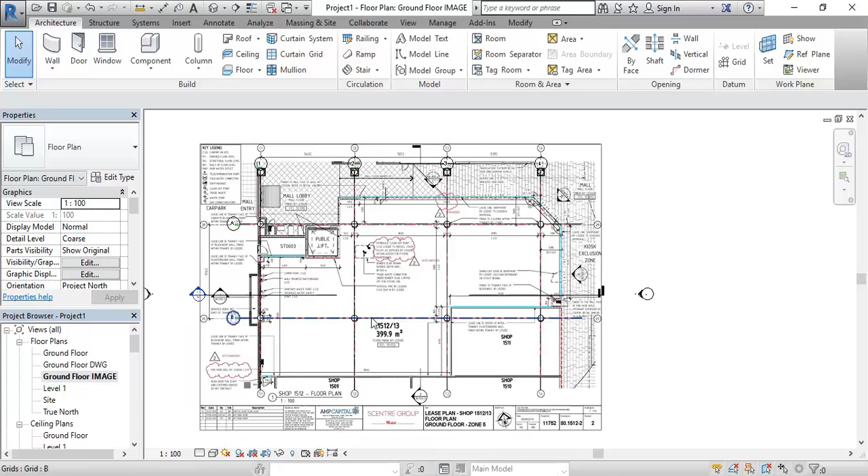Okay, so now to get a better feel for the project, particularly in 3D, I want to put in some more physical elements before I go too far with any more of the setup. So I'm going to start with these solid walls that we've got going around most of this tenancy.

Just some tips here for that setup, because you could just trace them off the plan, but particularly where it's an important reference, as you've got down here. So here it's probably set out from a grid line or something, also it's not a grid line, but we've got a measurement for that. And then also over here.

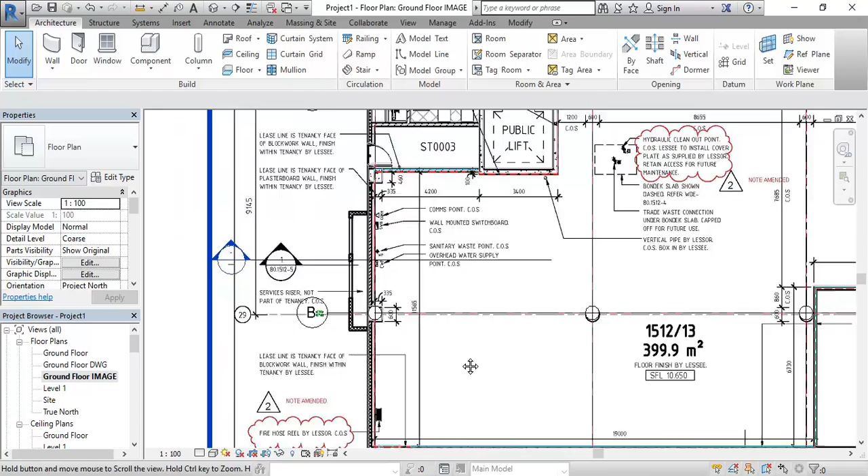So what you should usually do there is think about using reference planes as well as the grids to establish some of those measurements. So I'm going to draw a reference plane.

So again, I should just remind you, it's on the architecture tab. You'll find the reference plane tool in the very last panel there, which is work plane, and then you can see the reference plane tool. And it's very similar to drawing grid lines.

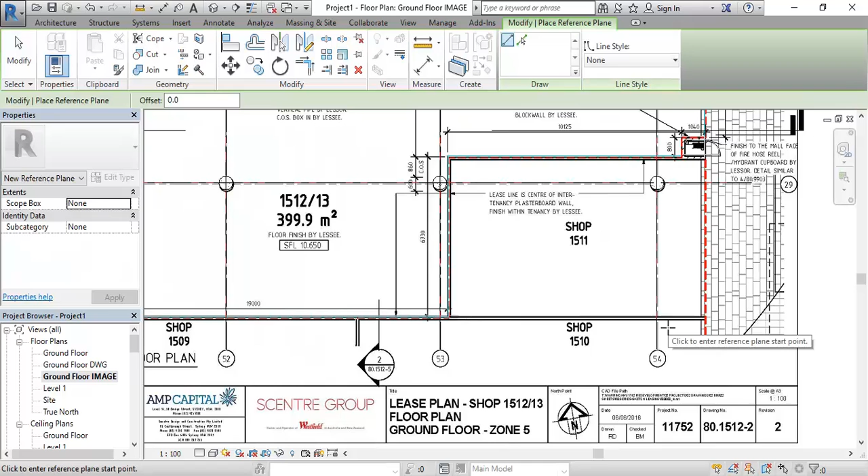So I'm going to zoom in though to trace the line of that wall and bring it over all the way to the left so that it goes about as far as the grid line. The inside - and the reason is it's an interior project, so the interior measurements are really what we're focusing on.

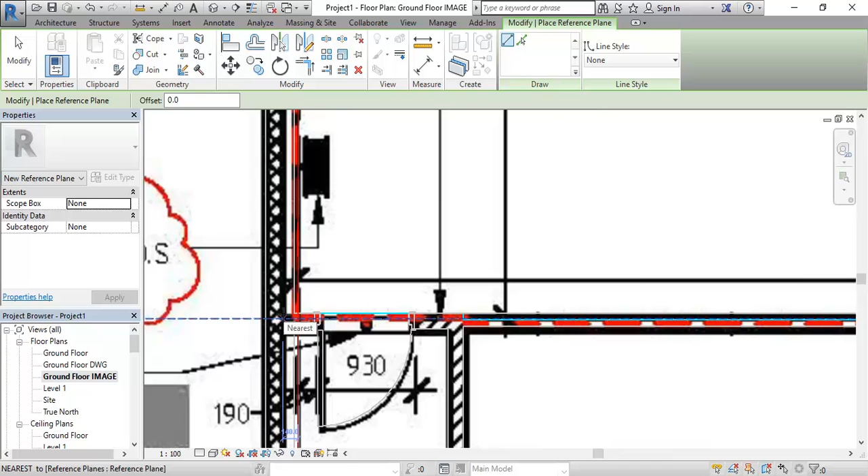Okay, so I'm going to press escape now a couple of times so that I can select that reference plane and have a look at the dimensions.

So now the way this was dimensioned isn't all that helpful, but we can mathematically work out what it should be.

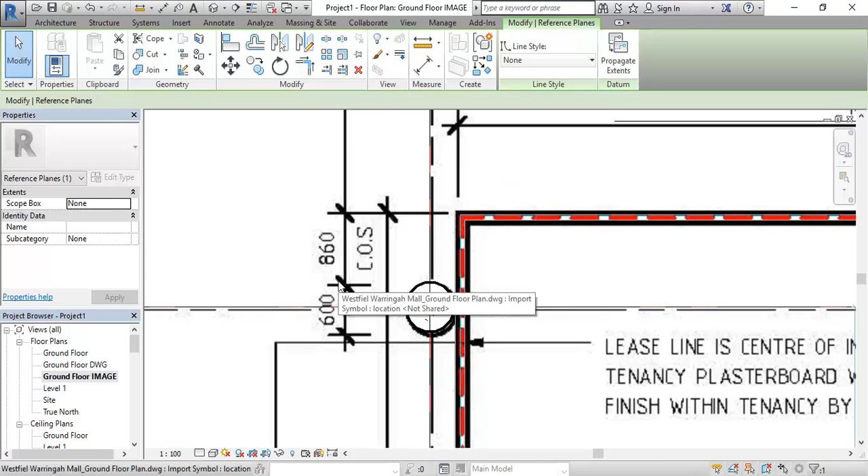So you can see you've got the column size there, we know it's 600. So half of that is 300. And then we've got the other measurement there, 860. So 300 plus 860 is 1160. And so 1160 subtracted from this number should give us the distance from the grid line to the wall.

And you need to do calculations like that when you have dimensions given to you like this. I know it might seem quicker to just draw it close to the right spot, but you're actually just creating work for yourselves if you draw things inaccurately, and you'll know the people who draw things really slowly and take forever to make changes to their models are often the ones who've tried to do it too quickly at the beginning and done it too roughly.

So again, using those measurements, 1160 subtracted from 6730, minus 1160. So it's half of that column size. Half, yeah, because that's where the grid line is.

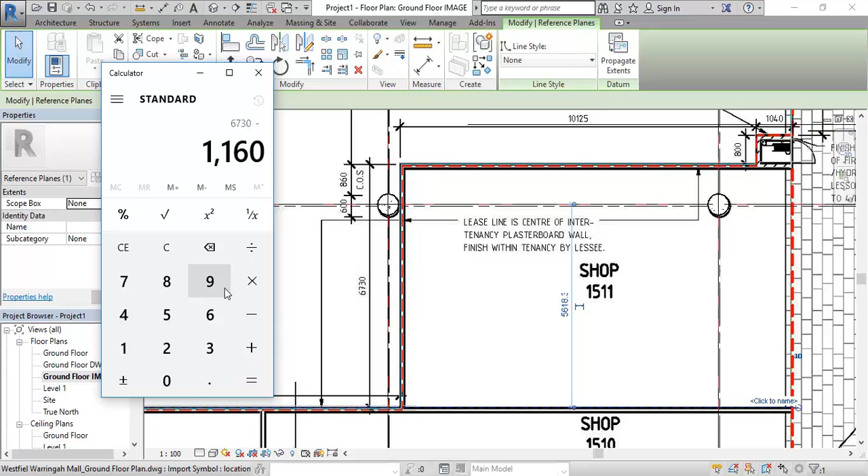So that equals 5570. So I can see over here it's actually 5618. So I can simply select that now and type in 5570, enter, and it's moved the reference plane slightly off the drawing, but that's okay, we know it's the right measurement.

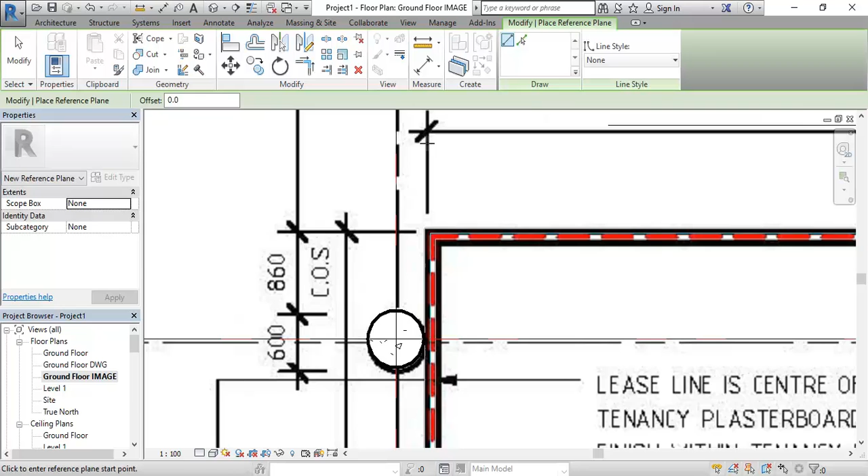So I'm going to do that for all of those exterior walls. I'm going to draw a reference plane, first by tracing, but then just trying to use a bit of logic to make these round numbers. They don't need to be exact copies of what's really been built or even what's been dimensioned here. The main thing is that they're round numbers.

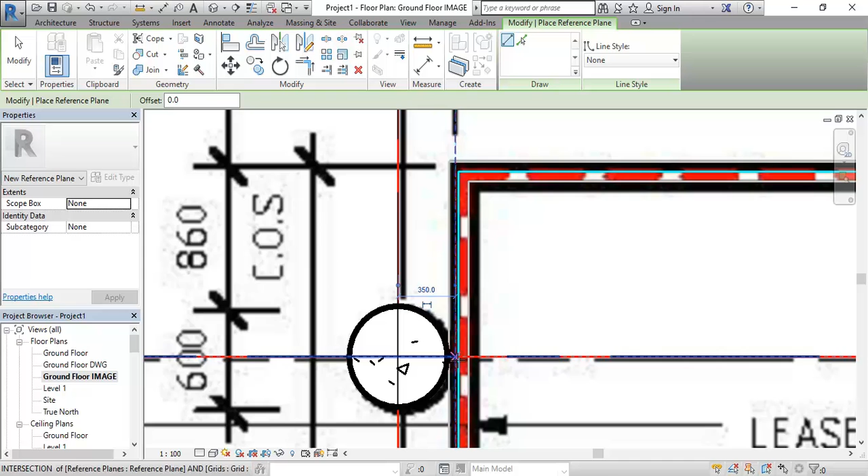So here 346 isn't a very easy to work with measurement, but I can easily round that off to 350, which is possibly what it is anyway. It's either 350 or 300 maybe, but I'd say that there is a little gap there.

So again, tracing the inside of this wall. And again, just looking at that temporary dimension there, and I'm going to round that off to maybe 1150.

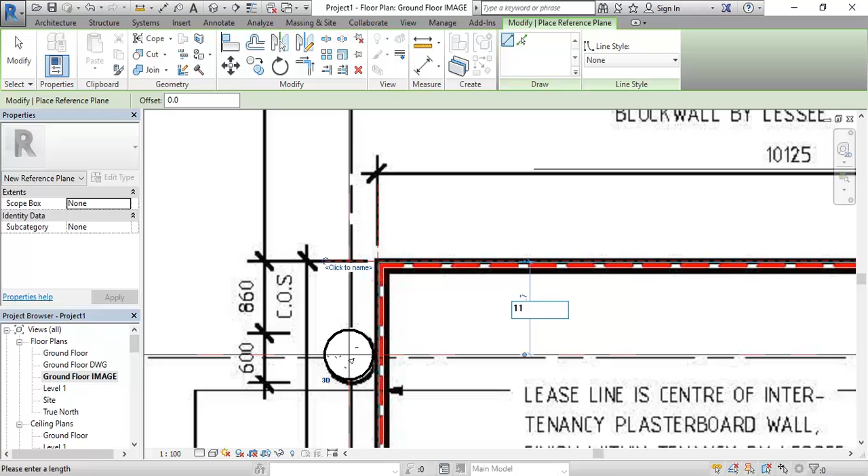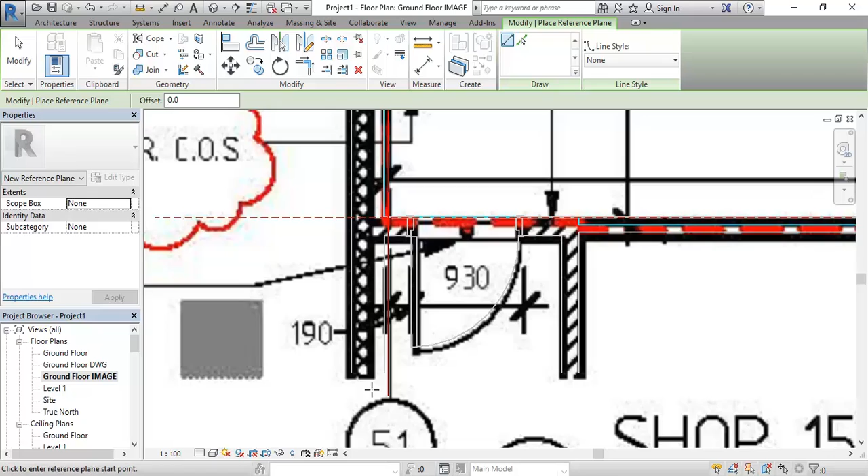And these walls that have the shop front, I'll leave for now, and we'll come back to those. So I'm just getting those other solid walls, again just trying to trace that inside face. And this should give you the size of your tenancy as well. So just tracing this all the way up.

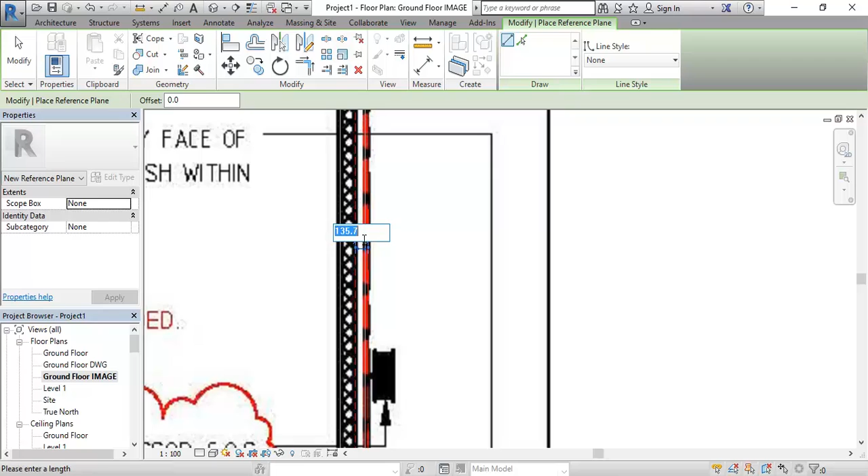Okay, so one more, oh sorry, two more. I think that's all I'll need for now.

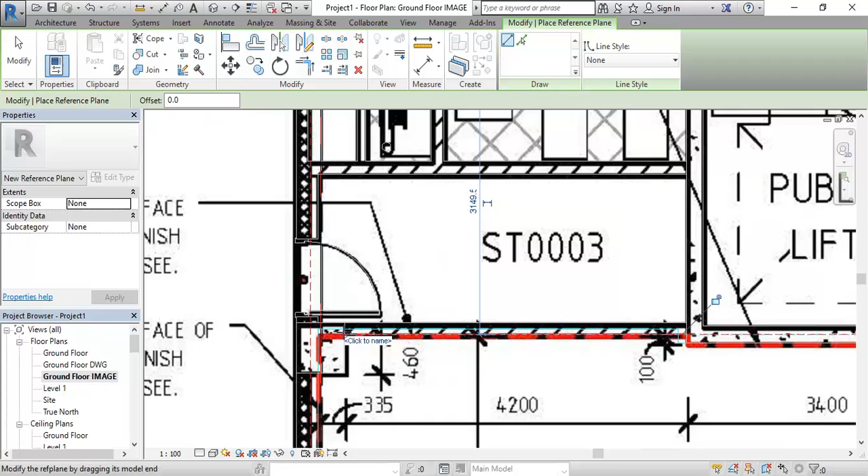Now you'll find sometimes that you'll have AutoCAD lines that if you trace will work pretty well. So I'm going to go back and have a look at the AutoCAD. See there, so that's actually turned out exactly the same, even though I didn't actually trace the AutoCAD there.

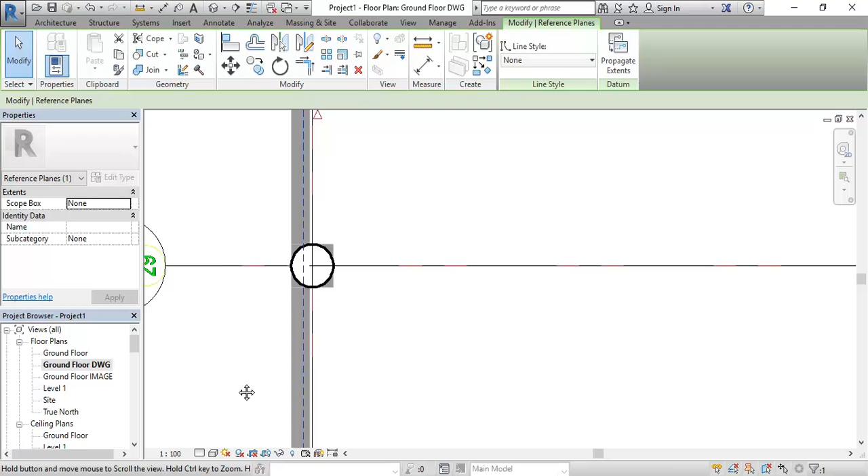This one is a little bit off. But I think this is actually, well, let's look in the one with the image. So I think the AutoCAD's wrong in some ways.

Yeah, so there you can see that's actually where the wall is, but in the AutoCAD version, it's different. So I'd say this one is more likely the right one.

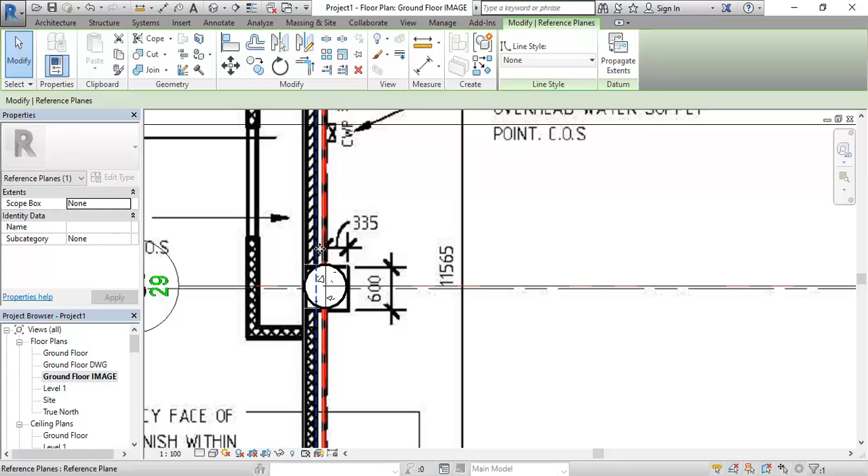Again, don't be too fussy about it. It's really just to make your life easier when you're working. It's generally much easier if you don't have lots of rough measurements. If you round things off and just try and make sure they're going to connect in a good way.

And so again, keep checking the original ground floor so that you can see the reference planes and the grids. The outside, yeah, so just the outside solid walls. Yep.

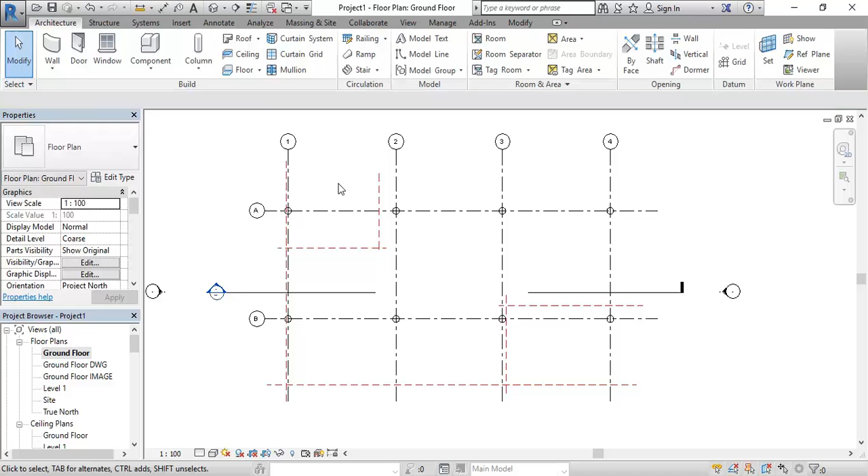So I'm just going to do the next step, and that should make it a bit clearer why I'm doing reference planes. Don't worry if you haven't done them all yet, because I'm just going to draw some walls now. And it should make it a lot clearer why I'm doing it this way.

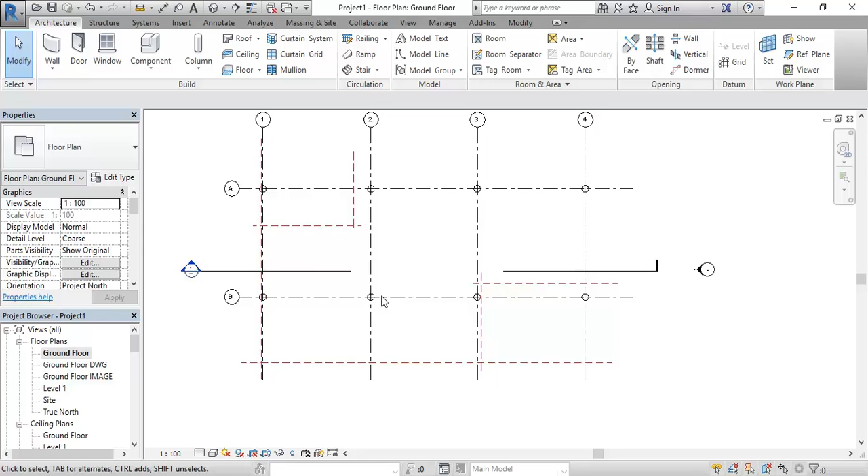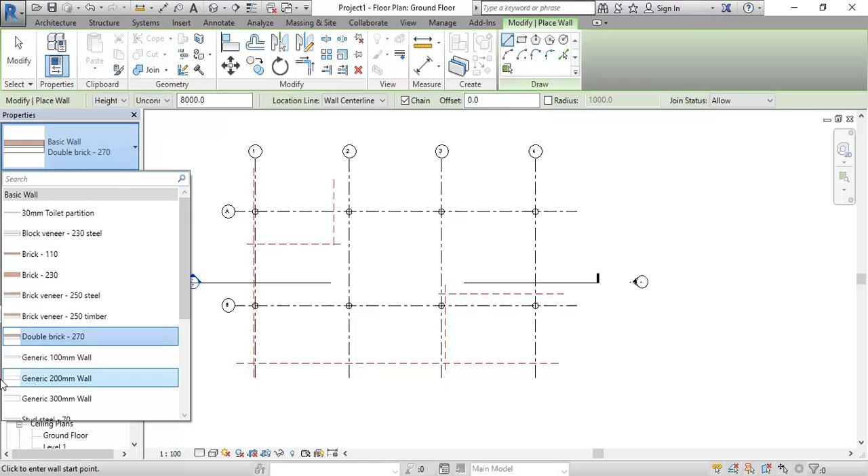So just by clicking on the wall tool, if you want to, it's walls architectural. And I'm going to then go and choose a generic wall type. You'll see in a second, it doesn't really matter which one. I'm going to choose generic 200mm. We're going to change it to something else in a minute.

So what I really want to show you here is the location line option. I'm going to change that to finish face interior. So again, you're setting out interior measurements. That's why we're using finish face interior.

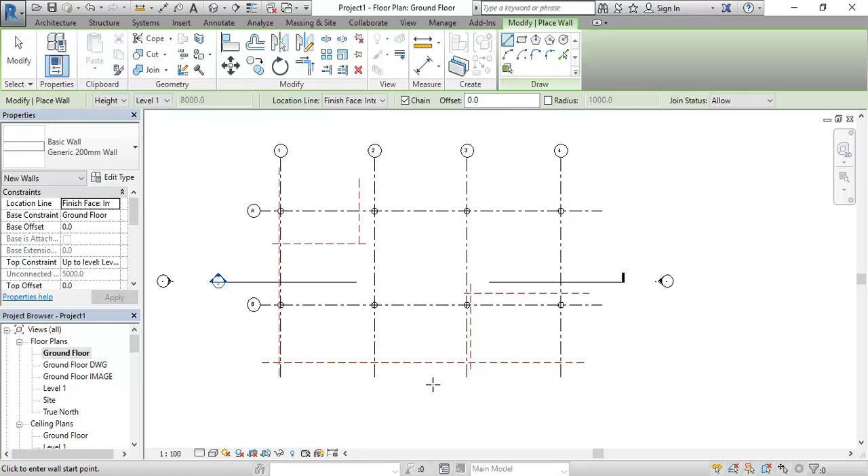I'm going to change the height option there as well. I'm going to leave it on height, but I'm going to change the option next to it to level 1. And then I'm going to draw over the reference planes that I've just made, starting here, maybe on the grid line.

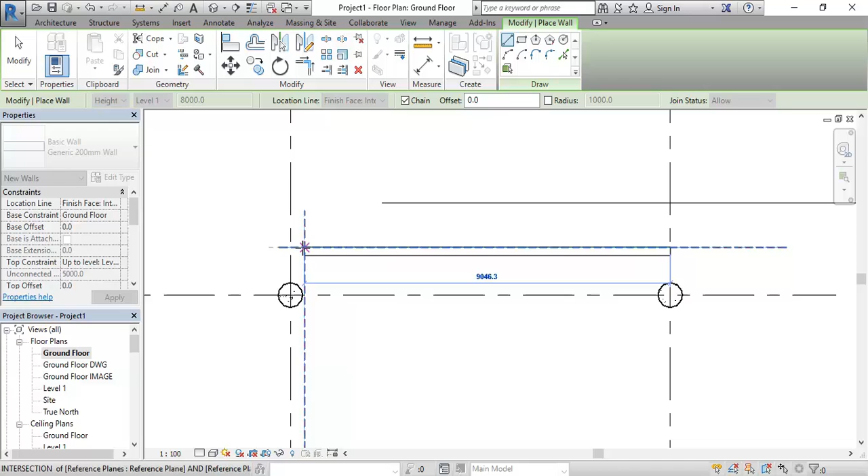I'm going to go to the left, and you can see that the wall goes above my reference plane. Coming over here, if I come down, the wall goes to the right, so you can see it's going outside the reference planes. I'm going to keep tracing all the way around those reference planes.

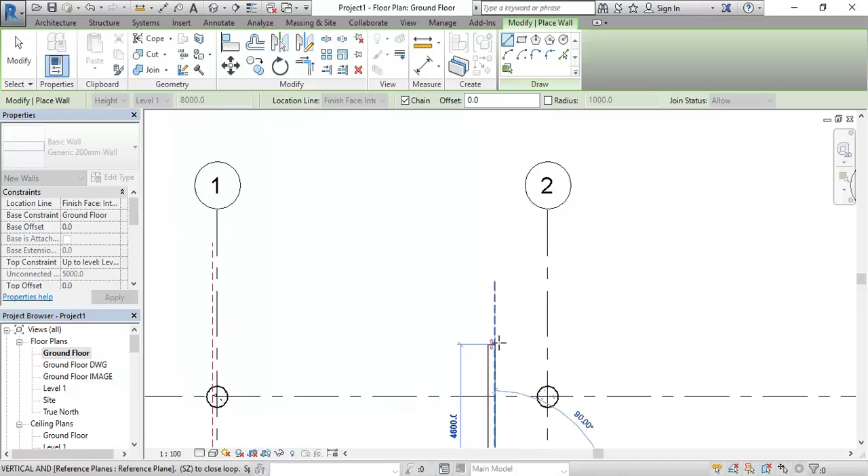So notice it's always going the right side, so the interior measurements aren't going to change. And here I'm just going to go up a little way on that reference plane.

So now if we compare this to the one that we've inserted, these wall thicknesses will most likely need to change. But when I change them, it's going to keep that edge where it is. So the internal sizes won't change. Your internal space is going to stay the same size no matter what, and that's what's important to you, that you have that internal space set out and maintained at that size.

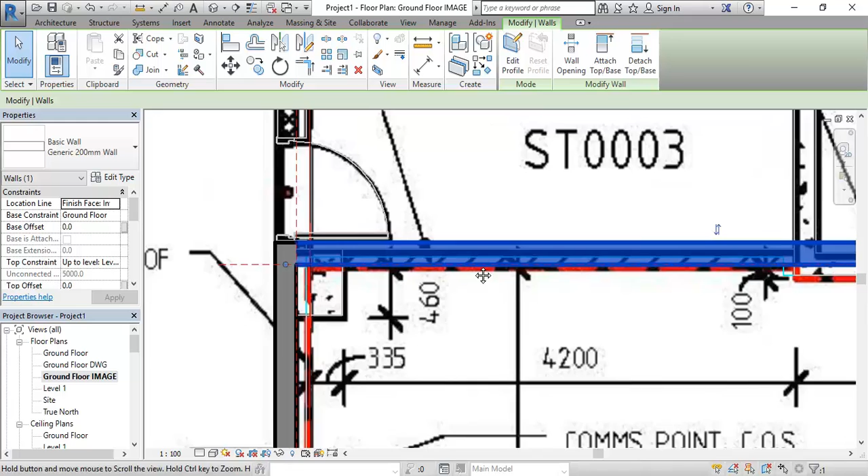So here, I'll just show you, this wall needs to be maybe half the thickness, so I can change it to generic 100 for now. Notice how the bottom stayed where it was, but the top's just been brought down.

So that's why the reference planes are important, because they establish clearly those critical constraints or the measurements for the interior. So I'll give you a second just to get up to that point.

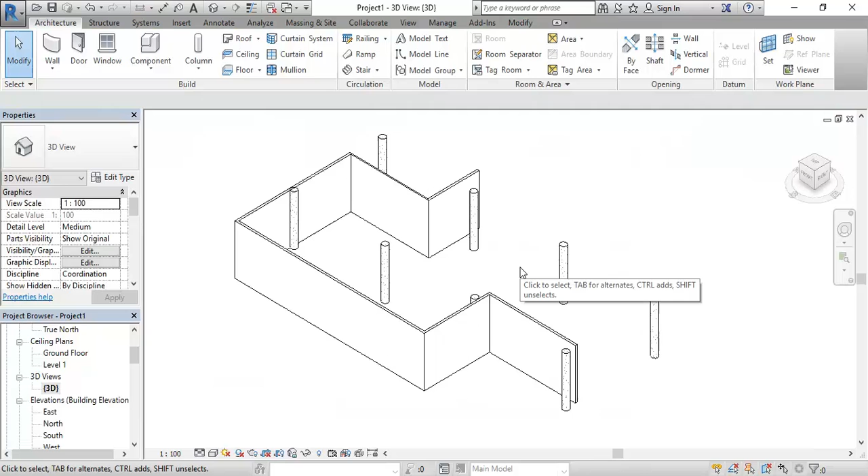You pretty much are, but you have to look at the PDF as well, yeah. Sure, sure, yep. This one? Yeah. So, yeah, the one with the PDF, I'll put that there as well.

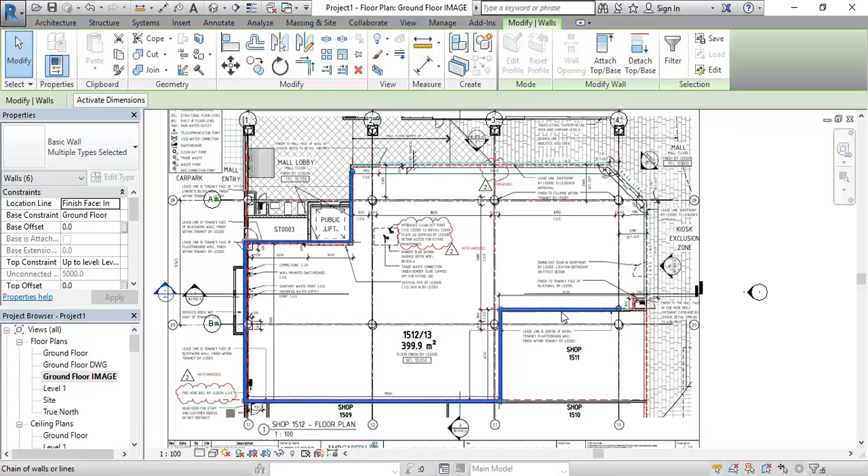So I might just highlight those walls so you can see the ones I've drawn over. I'll give you a tick to try that.